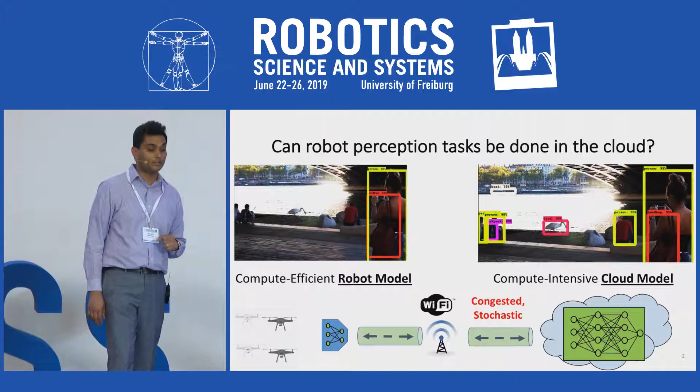If a battery-constrained small drone can't scalably run a cloud model, it can still send or offload rich sensory data, such as video or LiDAR, to the cloud, but this adds delay due to congested stochastic wireless links. Given the limitations of today's real-world networks, but also the accuracy benefits of cloud computing, the core contribution of our work is to design this offloading neural network logic, shown in blue, that decides at every time step whether a robot should use a fast local compute model or needs the accuracy of the cloud.

Despite the accuracy benefits of cloud computing, we seldom talk about the hidden costs of network congestion and cloud communication. As you can see on the left, today's robots are starting to see very rich sensory data, such as 4K video, which can be used to zoom in on very far-off objects to identify them, unlike HD video in this case. But this comes with the principal cost of high bandwidth transmissions over the crowded internet.

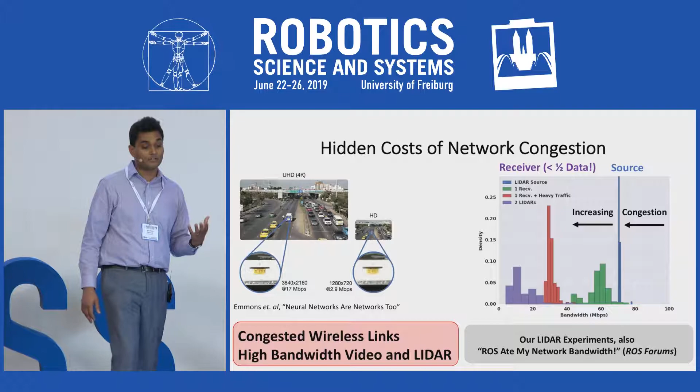As you can see on the right, in our network experiments using ROS, sending LiDAR point clouds over the network adds to congestion, and our current de facto standards are very bad at sending data. So a receiver, shown in purple, often sees less than half the data it was intended to see.

Given the limitations of today's wireless networks, but also the allure of cloud computing, we cast the problem of offloading to the cloud as an MDP. Suppose every robot has a strict budget on how many times it can query the cloud. Then given this budget, but also uncertainty about what the robot will see in the future and how the network will evolve, we have to choose an optimal action of which model is best to use at the current time point.

Since it's very hard to analytically model both how the network evolves and what you'll see in the future, we turn to model-free deep reinforcement learning to learn our offloading decision-making policy. It's control theoretic because a robot needs to carefully manage when it queries the cloud using a strict budget and uncertainty. So the goal of our offloading policy, or RL agent, is to maximize reward.

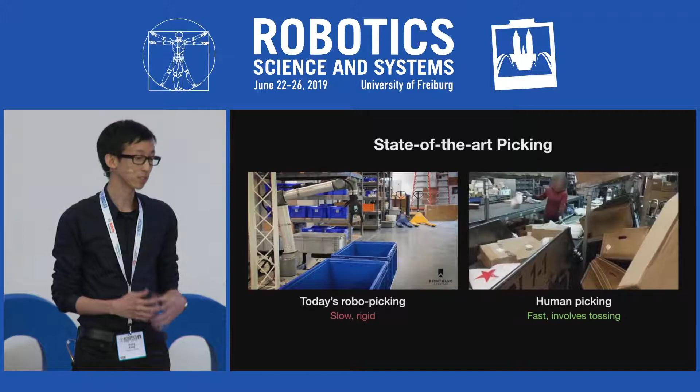Many pick-and-place solutions today are characterized by slow and rigid movements. This is very different from how a human does picking, which is often fast, fluid, and often involves tossing things around. Can our robots do the same?

In this work, we're interested in enabling robots to throw objects to improve both speed and reachability. The task is to grasp arbitrary objects from a cluttered bin and accurately toss them into selected boxes located outside the maximum reach range of the robot. We call our system TossingBot, and while state-of-the-art systems achieve speeds of 200 to 300 mean picks per hour, we achieve more than 500.

Throwing is hard because it depends on many factors. For example, pre-throw conditions, like how you picked it up, can influence an object's projectile trajectory. If you grasp a screwdriver by the handle near the center of mass and throw it, it will land much closer than if you had grasped it from the metal tip, which would swing forward and land much farther. Other factors include varying object dynamics. For example, a ping pong ball will land even closer due to air resistance.

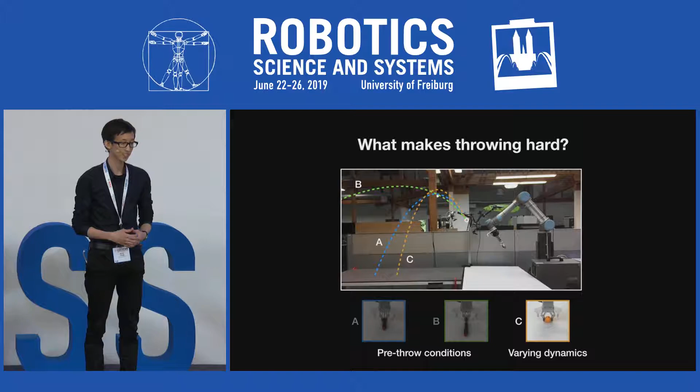To address these challenges, we present two key ideas. The first is that grasping and throwing are two tightly intertwined problems that should be learned jointly. This enables our system to acquire its own pre-throw conditions by learning how to execute stable grasps that lead to predictable throws. The second idea is to leverage both analytical controllers and deep learning to develop a hybrid controller for throwing that handles varying dynamics.

Specifically, we use a physics-based controller to estimate initial throwing velocities. Then we use a deep network to predict the data-driven residual. The initial estimates from the analytical controller generalize well to new target landing locations, while the data-driven residual focuses on learning to compensate for object-centric properties and dynamics. This combined formulation, which we call residual physics, gives us the best of both worlds and is broadly applicable to other tasks, not only throwing.

Here's our system pipeline, which takes as input a top-down RGBD height map of the scene, as well as a target landing location, and outputs dense pixel-wise grasping confidence scores, as well as corresponding throwing velocities to be executed with the motion primitive. The system is modeled with 3 interconnected fully convolutional networks, as well as a physics-based controller, which uses the ballistic equations of projectile motion.

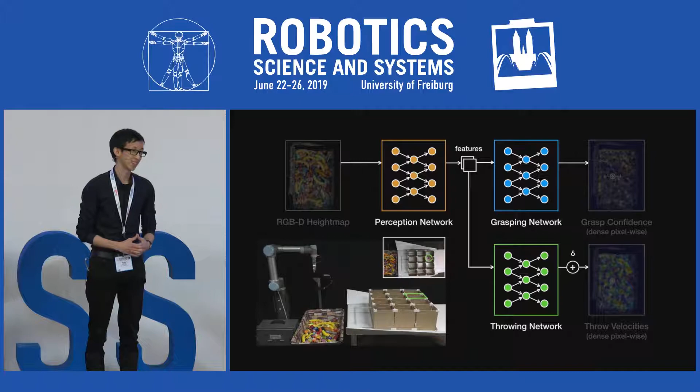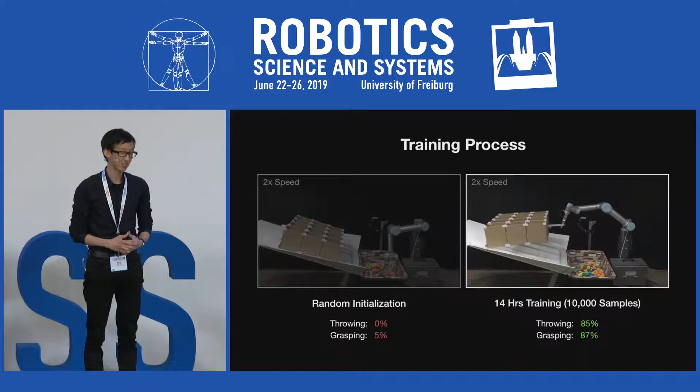Using overhead cameras to track where the object lands, the system improves itself over time through trial and error. During our experiments, the robot takes about 14 hours of real-world training to achieve 85% throwing accuracy, which is better than most of us engineers on the team. The robot also resets its own training so that human intervention is kept at a minimum.

And thanks to residual physics, the system is not only capable of generalizing to novel objects, but is also capable of working for new target landing locations not seen during training.

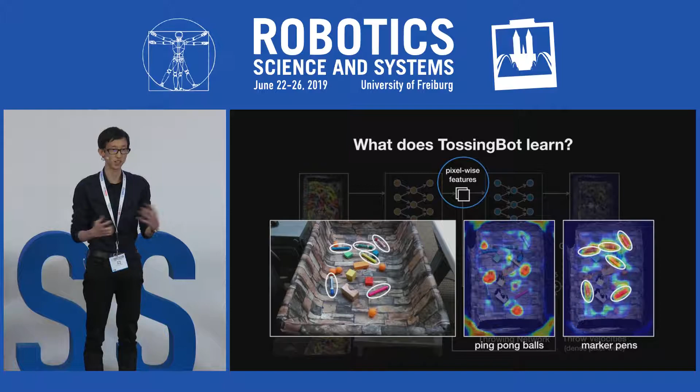So what does TossingBot learn? To explore this question, we extract the mid-level pixel-wise features from the deep network and visualize nearest neighbor clusters in the feature embedding space. Interestingly, this shows that all ping pong balls share similar features, and this is also true for all the marker pens in the scene. These features were learned without any explicit semantic supervision, which suggests that it's possible for robots to discover and learn how to distinguish between different objects on their own, simply through physical interactions.

Happy to talk more about this work offline. Thank you.

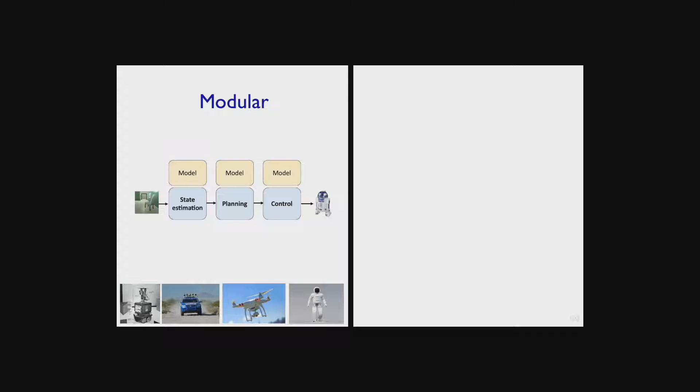The majority of robots today are built on the principle of modularity. The system is composed of models and algorithms, like state estimation, planning, and control. However, modular systems are often brittle because of approximations and modeling errors. In response, the modern end-to-end approach directly optimizes for the task objective using deep neural networks. This produces powerful but highly specialized systems that need large amounts of data to train. We want to reconcile the apparent conflict between the two sides and combine the modularity principle with task-oriented end-to-end learning.

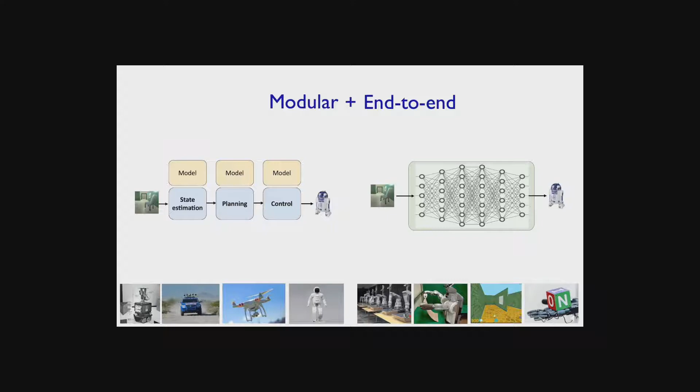We introduced the differentiable algorithm network, DAN. DAN has a modular structure of models and algorithms, but at the same time it is trained end-to-end. The key is to use a differentiable computation graph as a unified representation of both models and algorithms. This computation graph is similar to a neural network, but it also has fixed operations that implement an algorithm, for example a planner. Because it is differentiable, we can backpropagate through the algorithm and train models end-to-end.

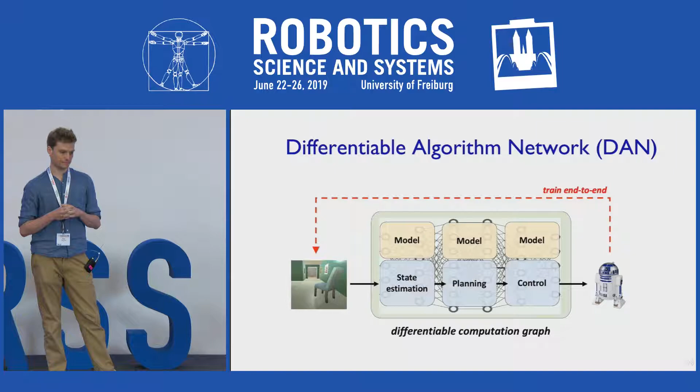Prior work has developed differentiable implementations of many robot algorithms. Here, we put them together and formulate a system design methodology general to many domains. We perform a case study for visual navigation. These are examples of our system navigating in a previously unseen environment, having only a floor map. This is a challenging, partially observable problem.

We need to localize on an abstract 2D map, having only images from a monocular camera showing rich visual features of the 3D environment. Further, we need to navigate to a distant goal while avoiding obstacles not indicated on the map. We tried the standard modular system with perception, state estimation, planning, and control. We also tried an end-to-end neural network with a search over the architecture. They both succeed sometimes, but not always.

Now we take the same modular system, but train it end-to-end using DAN. This system succeeds 99.8% of the trials. So why does that happen?

Compared to a standard neural network, DAN has a particular structure, a task-specific prior, that allows learning from much less data. The modular system learns models independently, and it fails because of modeling errors and algorithmic approximations. DAN increases robustness against approximations by training the models end-to-end, optimizing for the task and for the particular algorithms.

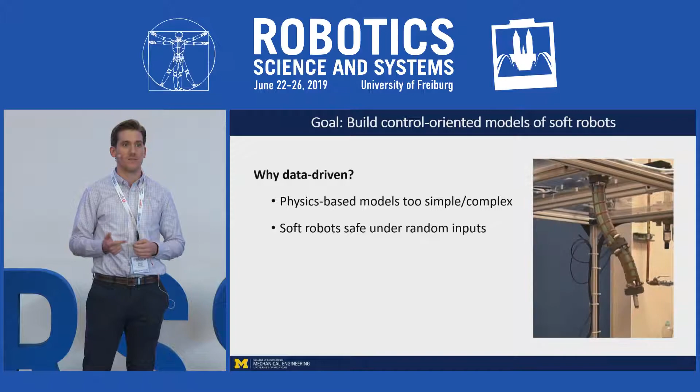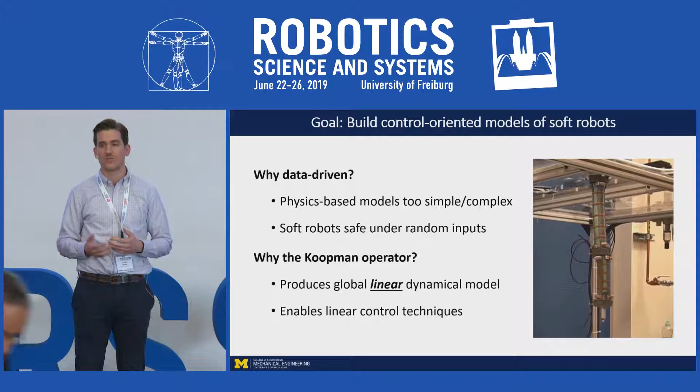The second reason we use data is that soft robots are easy to collect data on, because you can safely give them random control inputs without risk of damage. Now, instead of learning a black box model from data, we thought to use the Koopman operator because it provides an explicit linear model that captures the global dynamic behavior of a nonlinear system. As I'll show, this allows us to use linear control techniques to control a soft robot.

The Koopman operator makes this possible by representing the evolution of the state of a nonlinear dynamical system as a linear operation. So to illustrate how this works, consider some arbitrary nonlinear dynamical system.

Its flow map takes an initial state and flows it forward in time according to the dynamics. Now consider some real-valued function. The Koopman operator is defined as the linear operator that composes functions like this with the flow map of the dynamical system. So if we evaluate the function at the initial state, the Koopman operator flows the value of that function forward in time along the trajectory of the underlying system.

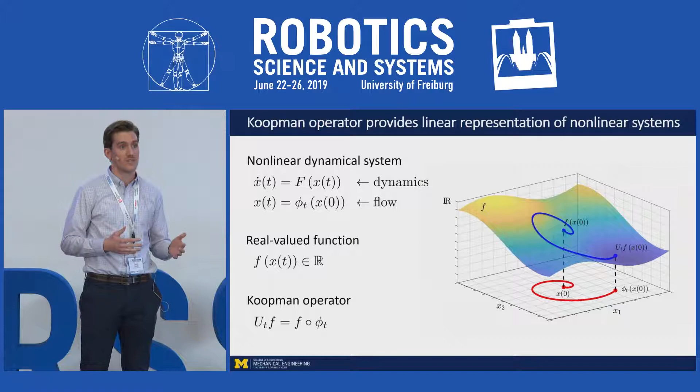Essentially, this lets us linearly compute the future values of functions, from which we can readily infer the value of the state. Now, the caveat here is that the Koopman operator acts on functions, and this makes it infinite dimensional. So in practice, we have to settle for a finite dimensional approximation, which we can learn from data.

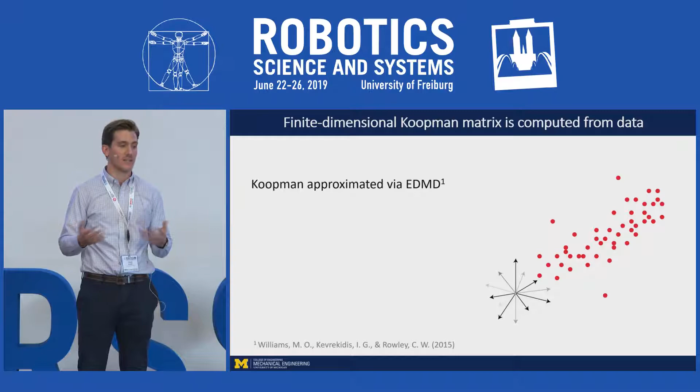The standard method used to compute a matrix approximation of the Koopman operator is called extended dynamic mode decomposition. It involves evaluating a finite set of basis functions on time series data points, and then using linear regression to compute the matrix operator that best describes the evolution of those functions over one time step.

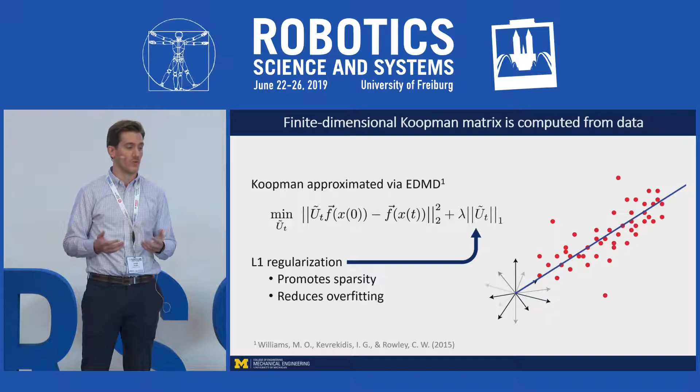In this work, we improve upon this standard method by incorporating an L1 regularization term. This term makes the resulting Koopman matrix less sensitive to outliers in the data. It also promotes sparsity, which is important for real-time control because it improves the computational tractability.

So we use this approach to model and then control the soft robot shown here. It consists of two bending sections actuated by pneumatic artificial muscles, and it projects a laser dot onto a sheet mounted below it. First, we collected data by measuring the location of the laser dot under random control inputs.

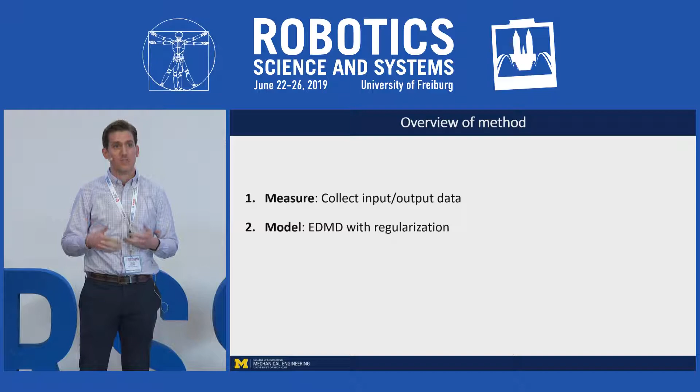Then we used that data to approximate the Koopman operator and verify that it gave accurate predictions over time. And then lastly, we used that Koopman operator approximation to compute online predictions in a closed-loop linear model predictive controller.

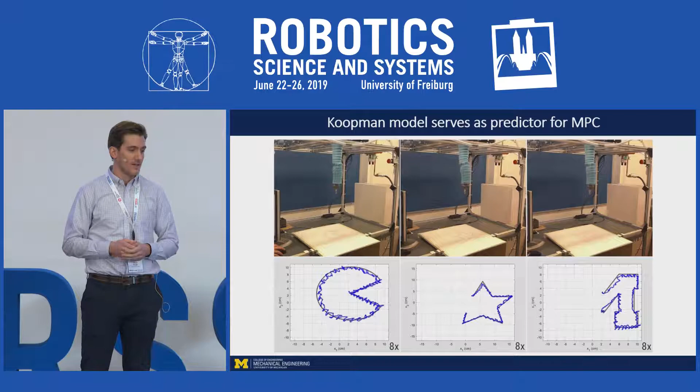Shown here are several trials where, using this Koopman-based model predictive controller, the robot is able to successfully track trajectories in various shapes. And what we found is that our controller proved to be roughly 4 times more accurate and 4 times more precise than a comparison benchmark linear MPC controller. Details of that comparison can be found in the paper.

Hi everyone, I'm Nolan, and I'll be talking about our work, An Online Learning Approach to Model Predictive Control. In this paper, we take an online learning perspective to MPC and propose a general algorithm, DMD-MPC, that recovers state-of-the-art MPC algorithms and lets us systematically generate new MPC algorithms. Finally, we verify this approach on a real-world aggressive driving task.

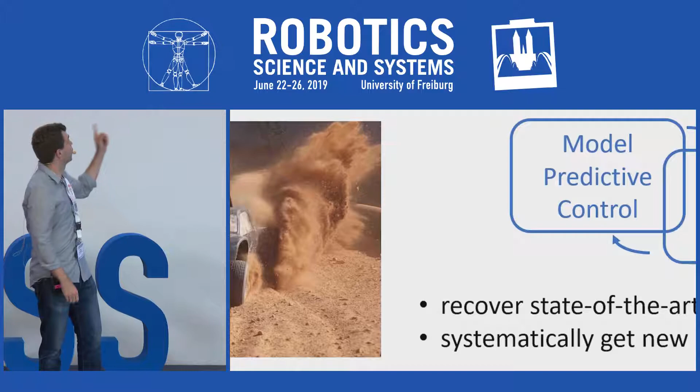First, I'll explain MPC and then its connection to online learning. Let's say we are controlling a robot car around a track. In model predictive control, we maintain an open-loop control sequence, which we then optimize. We then execute the plan on the real system by executing the first control on the system, and then the system will give us back some information for the next step. To bootstrap from the next step, we shift the plan one forward in time, and again repeat the process, optimizing the plan, executing it on the real system, and getting back some update information.

With that setup, we can now make the connection to online learning. In online learning, we have a learner.

Hi, everyone. I'm Nolan, and I'll be talking about our work, an online learning approach to model predictive control. In this paper, we take an online learning perspective to MPC and propose a general algorithm, DMD-MPC, which recovers state-of-the-art MPC algorithms and lets us systematically generate new MPC algorithms. We then verify this approach on a real-world aggressive driving task.

First, I'll explain MPC and then its connection to online learning. Let's say we are controlling this robot car around a track. In model predictive control, we maintain some open-loop control sequence, which we then optimize.

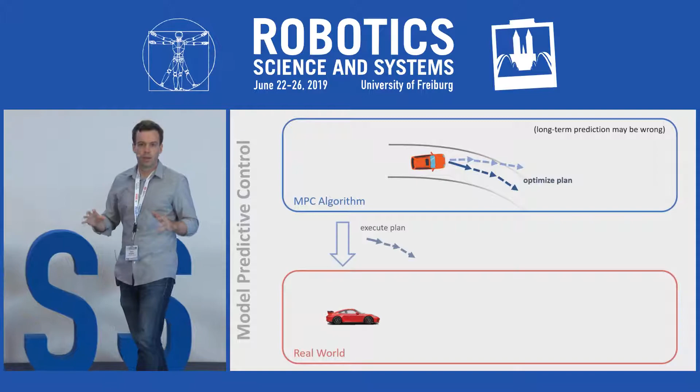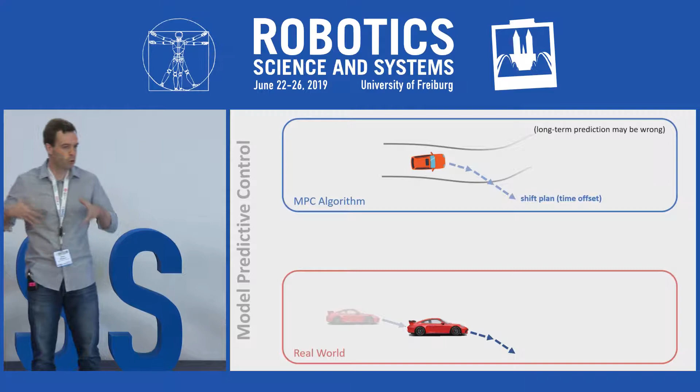We then execute the plan on the real system by executing the first control, and this real system will give us back some information for the next time step. To bootstrap for the next time step, we shift the plan forward one time step. At the next step, we again repeat the process: optimizing the plan, executing it on the real system, and getting back some information.

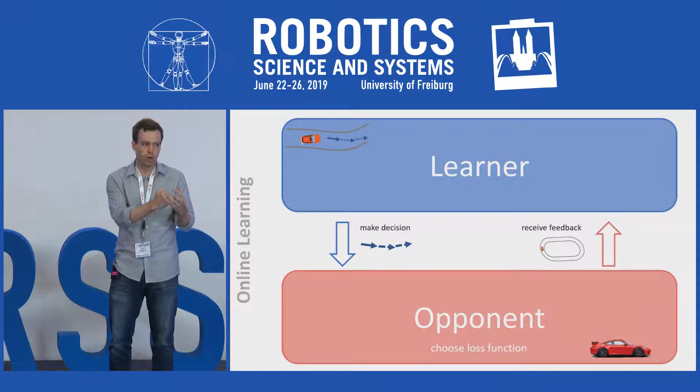With that setup, we can now make the connection to online learning. In online learning, we have a learner and an opponent. The learner makes some decision. In response, the opponent chooses a loss function, which acts as feedback to the learner, who in response updates their decision based on the feedback for the next round.

In DMD-MPC, the learner sends the current control and future plan to the opponent. The opponent's loss function then measures whether that future plan will remain optimal after applying the current control on the real system. The feedback will then be the gradient of the loss function.

The decision update will then work like this. First, we calculate the gradient at the initial plan. Then, we apply a mirror descent step on the plan, which involves minimizing some linearized loss given by the gradient, plus a geometric regularization given by a step size and Bregman divergence.

To prepare for the next round of the problem, we shift forward one time step by executing the current control on the system and sliding the future plan forward one time step. This online learning perspective reveals certain parameters: control distribution, loss, Bregman divergence, and step size, which, as we'll see, provides us a lot of flexibility.

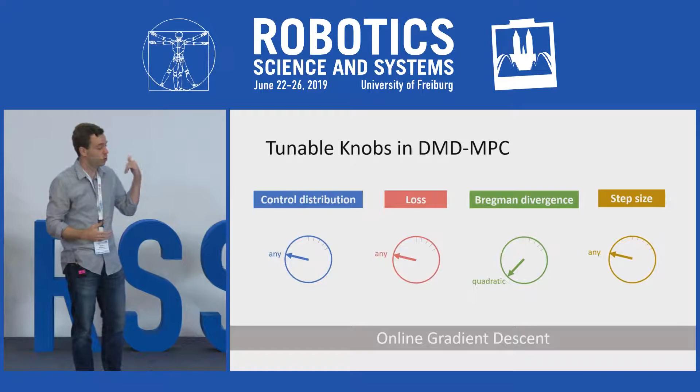For instance, we can generate general purpose algorithms like online gradient descent with a quadratic divergence and any choice for the rest of the parameters. If instead we use a Fisher information matrix, we get natural gradient descent.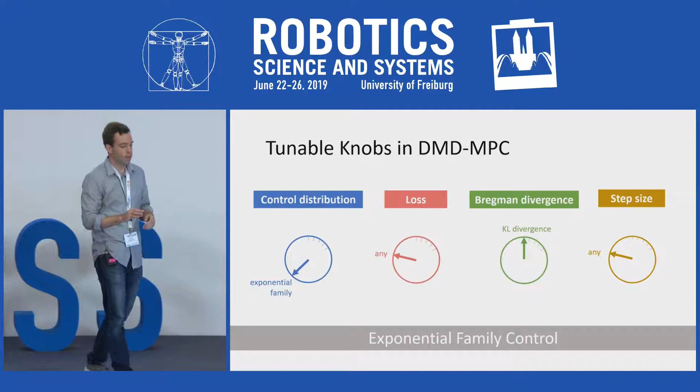If our control distribution instead belongs to the exponential family and we use a KL divergence, we get a general exponential family control algorithm. If instead we have a special form like quadratic loss and divergence, we get the solution to LQR. If we have a categorical distribution and KL divergence, we get a discrete control algorithm.

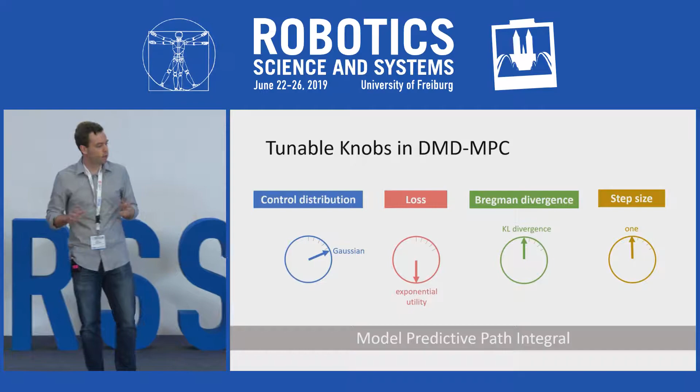With the Gaussian distribution and threshold utility, we recover the cross-entropy method. And finally, with the exponential utility, we recover the model predictive path integral control algorithm. So by simply choosing these parameters, we can systematically generate new MPC algorithms.

Finally, we validate our approach on a real-world aggressive driving task, which involves getting a 1/5 scale rally car to drive as fast as possible on a track. In DMD-MPC, the update gradient is ultimately estimated with random samples, in this case a paltry 64 samples, causing a rather noisy gradient estimate. Such few samples might be expected from a low-power embedded system, for instance.

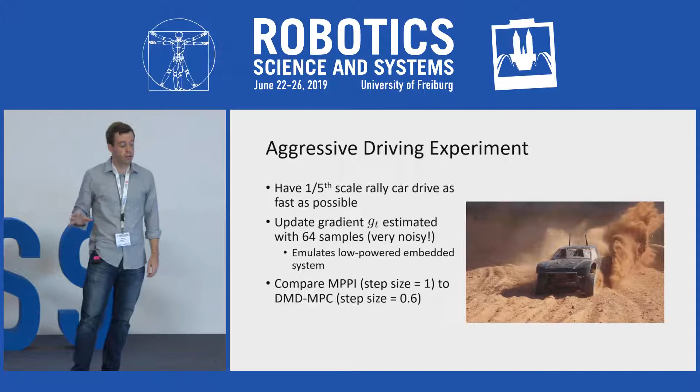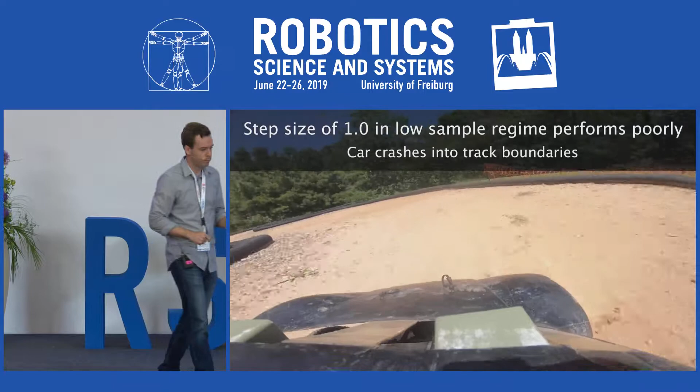In our experiments, we compare MPPI, which has a step size of 1, to the corresponding DMD-MPC rule with a step size of 0.6. With a step size of 1, we get rather unsteady behavior. For instance, the car suddenly turns around over here and goes the wrong way. Here, it drives into this barrier at a moderate speed. And finally, at high speed, it crashes into this barrier.

On the other hand, with a step size of 0.6, we achieve smooth yet aggressive driving with no crashes, and only slightly worse performance than the state-of-the-art version of MPPI that uses 1920 samples and a trajectory tracker.

Thank you all very much, and I'll be happy to answer your questions.

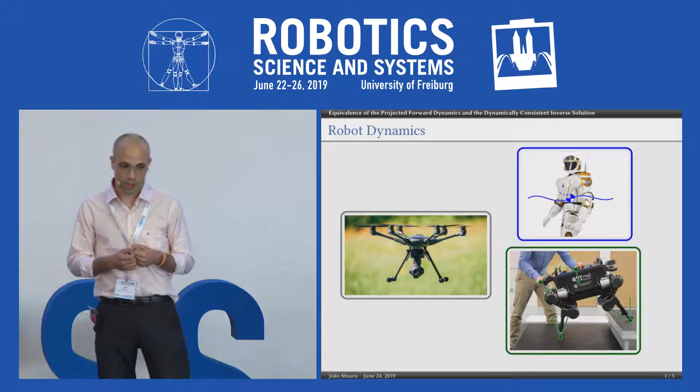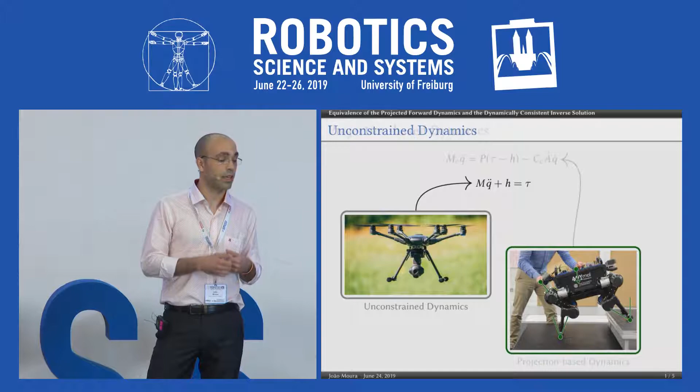So let's start with the contacts. We typically describe the dynamics of an unconstrained robot by its inertia matrix M. One interesting approach, from Aghili, to incorporate contacts in the dynamic model is to define a new constrained inertia matrix MC that captures those constraints. The key idea is to use a kinematic orthogonal projection P to filter the remaining free motion of the robot.

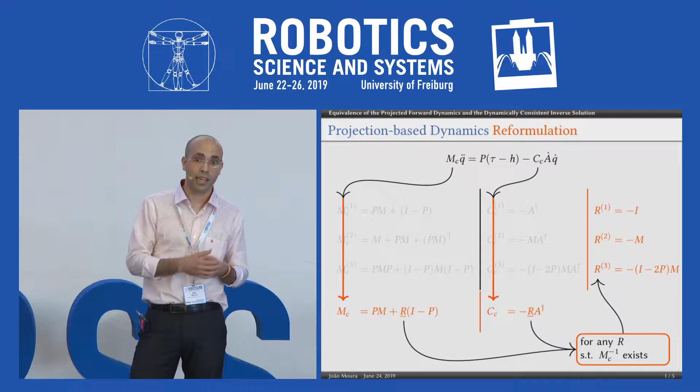There are many works that follow this projection-based dynamics approach when working with real robots having to deal with contacts. However, there are multiple constrained inertia matrices to choose from. So we start by proposing a reformulation that unifies all previous expressions into one, by expressing those two terms as a function of a common free matrix R. Why? First, this unification makes all our future derivations valid for all the previous expressions. Second, if R can be any other matrix, then we can try to find an optimal one.

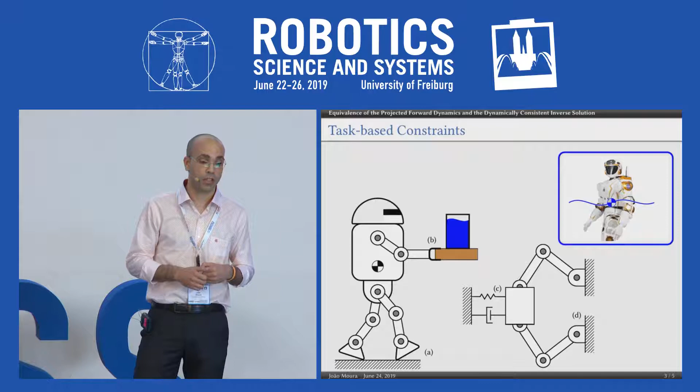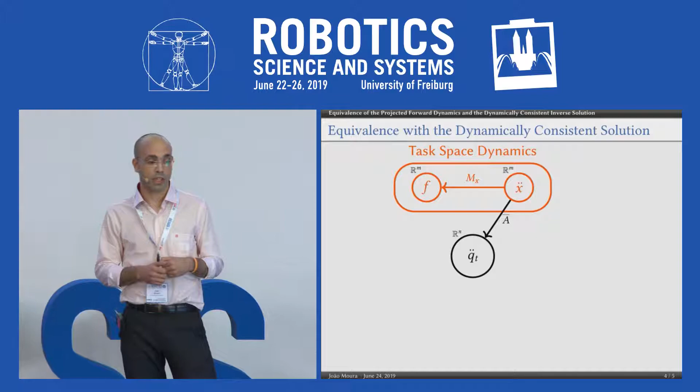So let's now consider motion tasks or behaviors, for example balancing a glass of water while walking, or having a compliant behavior for safe interaction. In that case we can write the equation of motion in the task space by defining a task space inertia matrix MX, and map that to the configuration space using the operational space formulation from Khatib.

In our work, by considering a broader class of task-based constraints, which essentially include both motion tasks and physical constraints, we prove the analytical equivalence of the operational space formulation, typically used for tasks, and the just reformulated projection-based dynamics approach, typically used for constraints.

Why does this matter? The key idea is that this equivalence can help us build a bridge between their associated bodies of research. For example, there are two separate parallel works that propose different operational space controllers with rigid constraints, with different expressions. In the first, De Sapio and Khatib take the operational space formulation and add equality constraints. In the second, Mistry and Righetti start with the projection-based dynamics and add the task space motion.

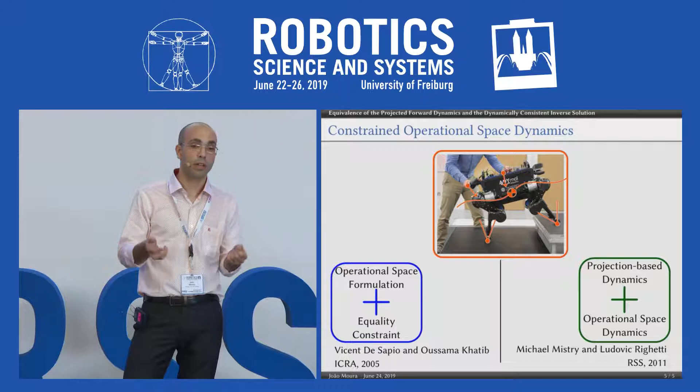By using our finding, we can easily show through simple algebraic manipulations that those two controllers are also equivalent. But bear in mind that these two works are particular instances of two families of research, which include various other controllers, motion planners, and even proofs on stability and robustness. Using our finding, we can now potentially adapt or transfer results from one formulation to another, and ultimately this will improve our understanding of these complex systems.

Thank you so much for your time.

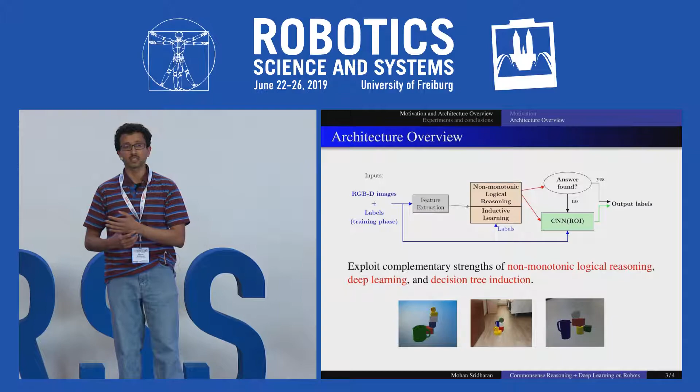Because we said we're going to couple reasoning and learning, anytime you send a sample to the CNN, you're implicitly accepting that your reasoning cannot deal with it. So in addition to just learning with CNN, you also take those same samples and induce additional rules with inductive learning, and it feeds back into your knowledge representation system.

And this gives you at least three key advantages. One, the underlying logical system lets you come up with explanations and answer hypothetical questions—what if something happened, right? The second and third advantages are quantitative in nature.

So if you look at that plot, comparing the red and blue, or the green and black, you see that for any given accuracy, you achieve that with a much smaller number of examples. This is for a simple simulated domain. If you take other robotics domains with more complexity, the difference is more pronounced, but it still scales because of the principles of relevance.

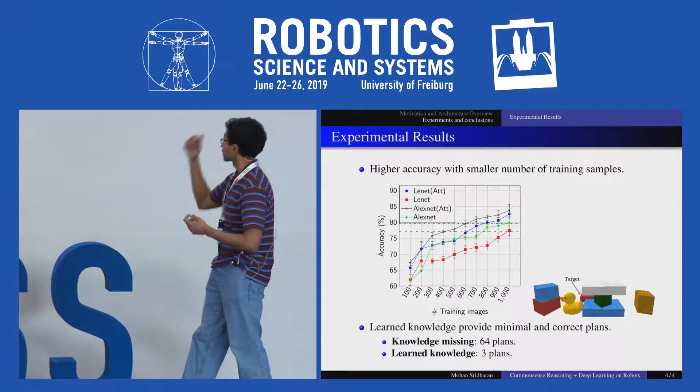The third thing is that because planning and learning are tightly coupled, anytime you learn, you also get better decisions. For that set of toys at the bottom, if you wanted to manipulate the red object and move it to a different location, initially you start with around 60 or 70 odd plans, many of which are incorrect or suboptimal. But if you learn over time, you're able to come up with 3 plans which are minimal and correct. There are additional details in the paper about non-monotonic logic and other aspects, but I'll stop here.

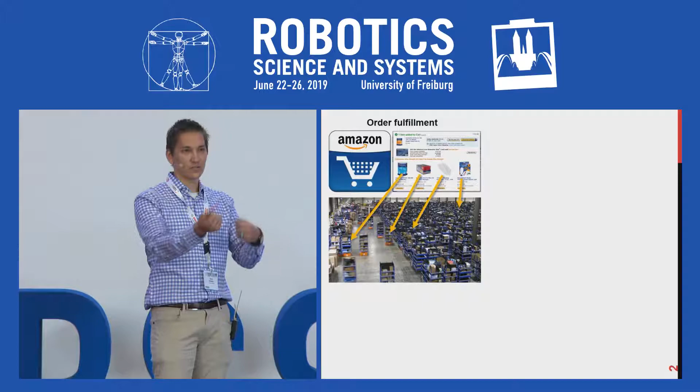In this paper, we're interested in a twist to this problem, which is that we don't know the arrival order of the items that are being given to us. This is common in fulfillment of Amazon orders that go out to a fulfillment center. Robots bring shelves to a packing station, either human or robot, which then needs to put items into a container to be shipped out. So here you don't necessarily control the order in which these robots arrive at your station.

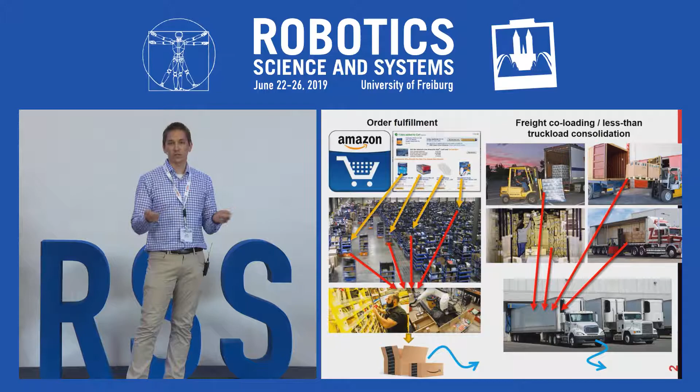This is also common in freight co-loading or less-than-truckload consolidation, where smaller loads come to a distribution center to be loaded into a larger freight truck. You may not be able to control in which order these smaller loads arrive. So this is a middle point between offline packing and online packing, traditional bin packing domains.

In this case, we want to verify that a container can contain the load, but we don't know the order. The first variant we introduce is called NDOP, non-deterministically ordered packing, where the sequence the objects arrive gets revealed to you after you've verified the container is feasible for all possible orders. In the second case, we have quasi-online packing, where you have to pick a location for the item when it's revealed to you, but you don't know in which order the subsequent items will be given to you.

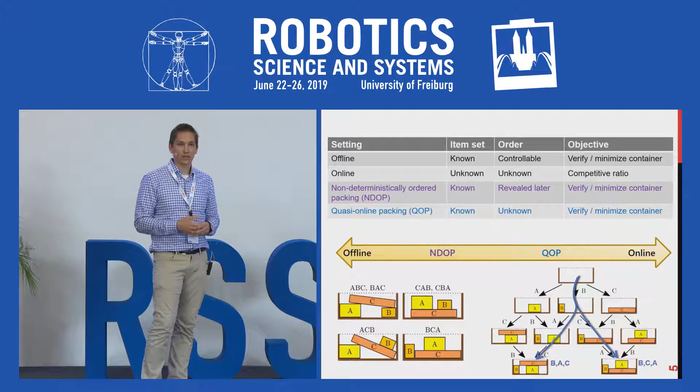What we do in this work is build off our previous work in 2019 ICRA, where we assume there's an offline planner available to us, which we call the Oracle. This Oracle uses stability constraints as well as loadability constraints to verify that a robot can load these items into a given container. We assume the Oracle's job is to handle all of these continuous constraints.

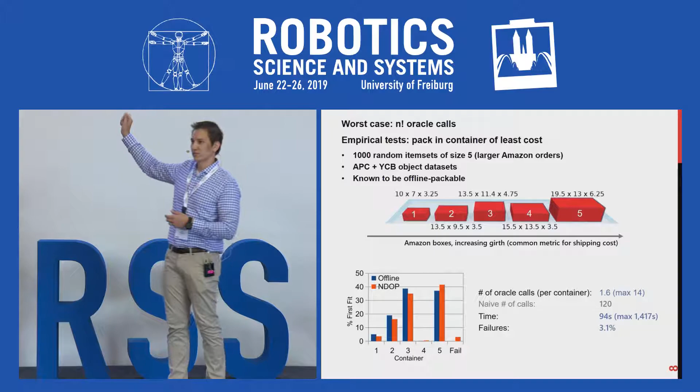What's interesting is that the solver inherits the completeness of the oracle—if the oracle is complete, the planner is too. Empirically, even though in the worst case this is still an n-factorial algorithm, the number of plans we have to solve in practice is very low. For the APC or YCB datasets, we sampled 1,000 random object sets. With 5 items, we have to solve on average 1.6 plans per container, much less than 120.

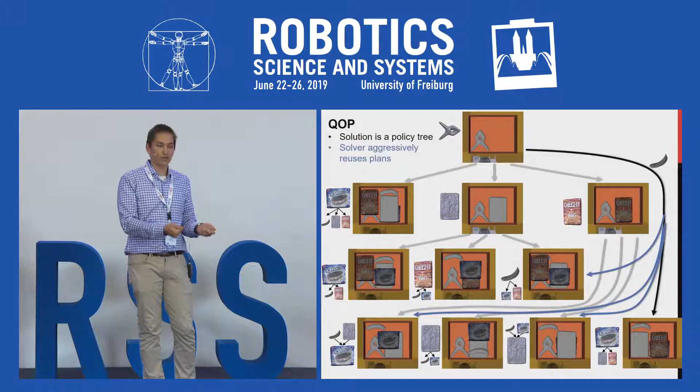For the quasi-online packing solution, the solution is interestingly a policy tree. For every item revealed to you, you have to place it in a given location. We still enumerate all the different leaves of this policy tree, which is a factorial number of leaves. But our algorithm very aggressively chooses to reuse plans generated before. For example, when this banana gets revealed, 3 of the possible future sequences can reuse plans generated in the previous enumeration of this tree.

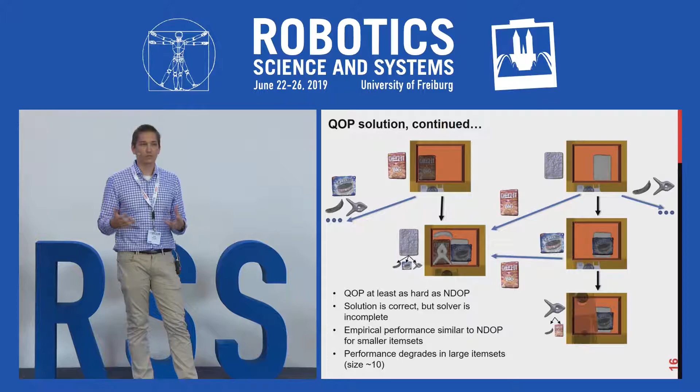If the banana is revealed after the pliers, that's what you do, but if the banana is revealed first, this is what you do, and so on. So it's actually quite a large tree. But we proved in this paper that the QOP problem is at least as hard as the NDOP problem. The solution is always correct, although the algorithm is incomplete, even though the oracle may be complete. There's a lot of interesting empirical performance—it's quite tractable with small numbers of items, but tends to break down for larger numbers of items. There's also a lot of interesting theoretical results.

I messed up with this poster, unless you can time travel, so I'll talk to you about this later. Thanks.

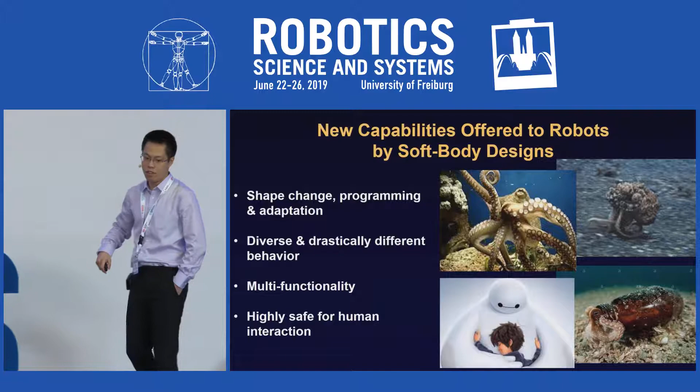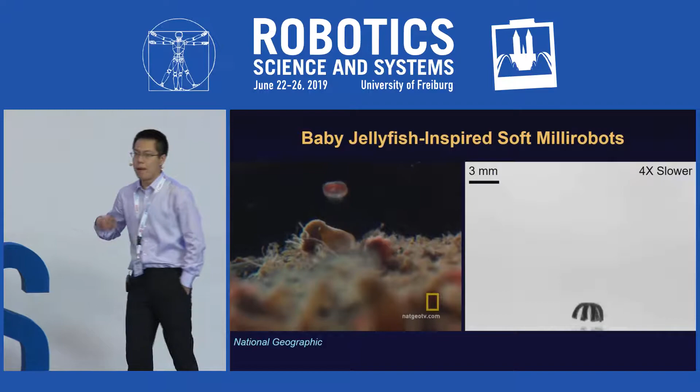A soft-bodied baby jellyfish is one of the most widely spread creatures in the ocean. It adopts a paddling motion to propel at millimeter scale. Inspired by this efficient swimming propulsion strategy, we developed a magnetic soft Milliswimmer that has the same size and can achieve the same motion as a real animal.

The real moon jellyfish has 8 arms, called lappets. We keep this design in our robot. Our robot is composed of 2 parts: the 8 magnetic lappets that can bend under an external magnetic field, and the passive non-magnetic polymer. The overall size of the robot is only 5 millimeters in diameter.

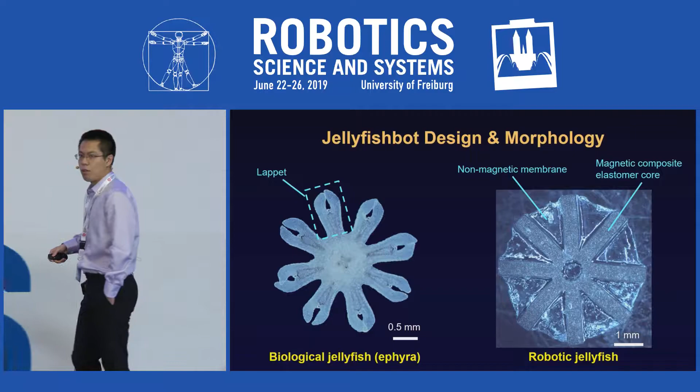To fabricate such a tiny robot, we first form a thin layer of magnetic soft material on a flat plate. Next, we use a UV laser to cut the lappets out from the plate. Then we use a pipette to drop a water droplet at the center of the magnetic lappets, and due to surface tension, the robot will be wrapped up into this shape.

We freeze the water droplet to keep the shape of the robot, and apply a uniform magnetic field to magnetize the material. This creates a magnetization profile that is critical to achieve the deformation under the external magnetic field. In the last step, we fill the gaps between the robot with non-magnetic polymers.

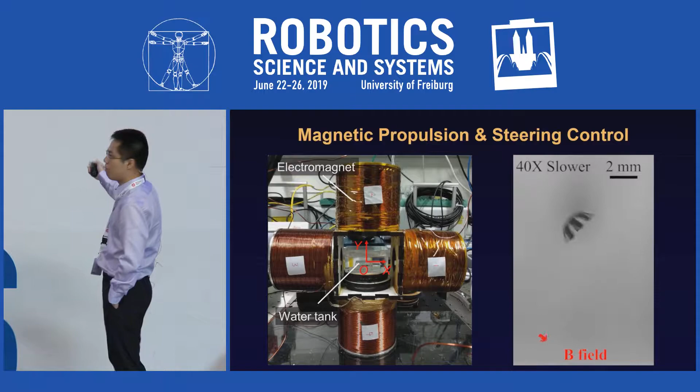The robot swims in a coil system that can provide an arbitrary direction of magnetic field. By applying an oscillating magnetic field along the body's central axis, the robot can realize propulsion. By rotating the direction of the magnetic field, the robot can be steered. The robot swims so fast that we slow down the video.

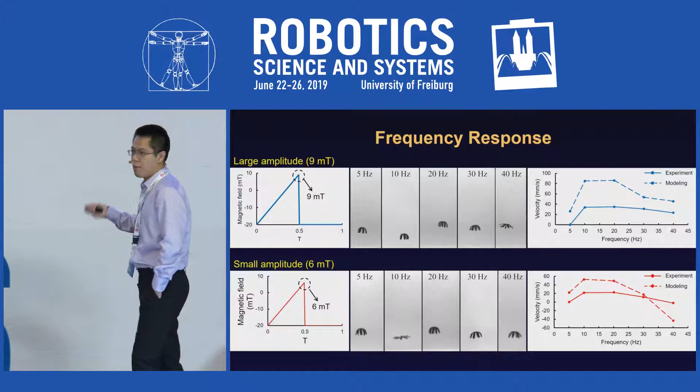We apply two kinds of control signals to evaluate the propulsion performance of the robot with different amplitudes. Both the modeling and the experiments demonstrate that the robot can achieve the highest swimming speed with a larger beating amplitude, and the optimal frequency is between 10 to 20 hertz.

We also demonstrate multiple functions towards medical applications on our robotic platform. In the left video, I will show you the robot can trap cargo during its propulsion using the fluid flow generated around its body. This function will be useful to transport drugs in complex environments.

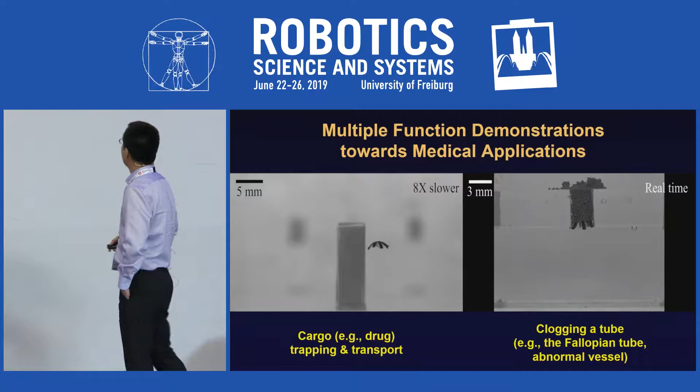In the right video, we show that due to the softness of the body, the robot can clog a tube. This function will be useful to clog a fallopian tube in the future for birth control. Another example: we can use a catheter to send the robot into the bladder, let it swim upwards, and finally attach to the cancerous tissue to release drugs for a long time.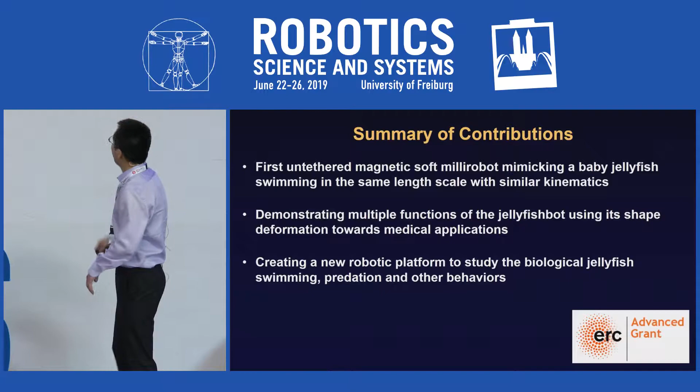In this study, we propose the first untethered magnetic soft milliswimmer that can mimic the swimming of a moon jellyfish at the same length scale. We demonstrate multi-functions towards medical application using the shape deformation. The robot itself is a very good platform to help us understand biologically relevant questions. Thanks for your attention.

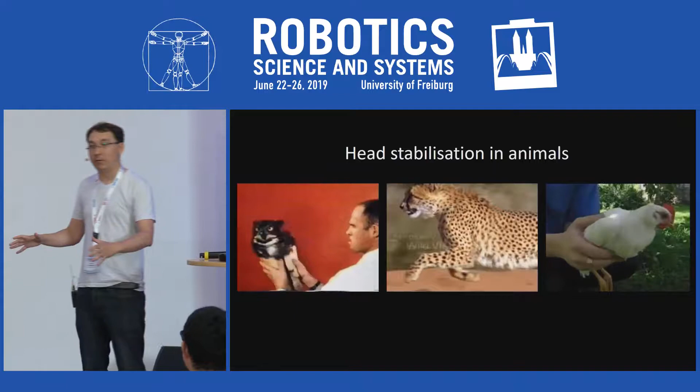Should robots do the same? Why is it important? Traditionally, robotic systems rely on ground information for stable locomotion, and more recent robotic systems start having their head stabilized. But why do we need to do this? Is it important?

Humans also stabilize their head, and for humans this is important for motion planning and stability. The goal of this study is to investigate the importance of head stabilization for verticality estimation.

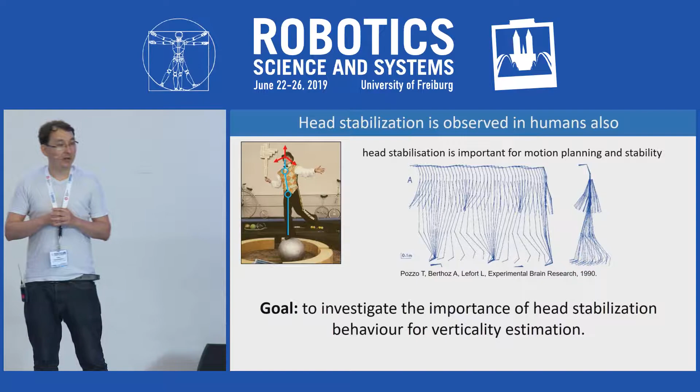Knowledge of gravitational vertical is important for stable locomotion, and otoliths located in our vestibular organ are responsible for this. In our work, we propose a model to demonstrate the importance of head stabilization behavior for verticality estimation. The model is composed of a head, trunk, head stabilization controller, and a spherical pendulum to mimic the behavior of an otolith organ.

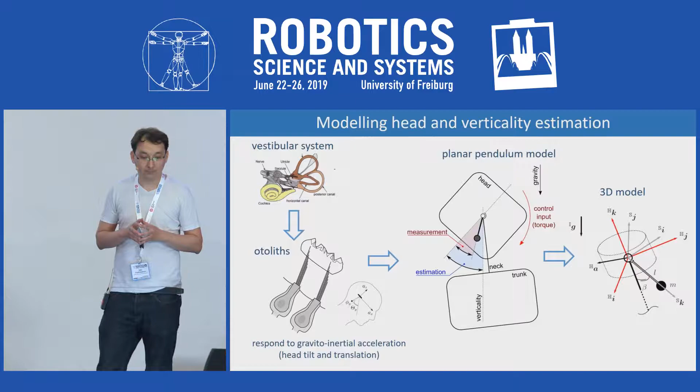Our vestibular sense can be tricked when our head is tilted and accelerated at the same time. This is called gravito-inertial ambiguity. But if the head is stabilized, we can assume that the pendulum or otolith can act as an accelerometer, and then a simpler linearized model can be used.

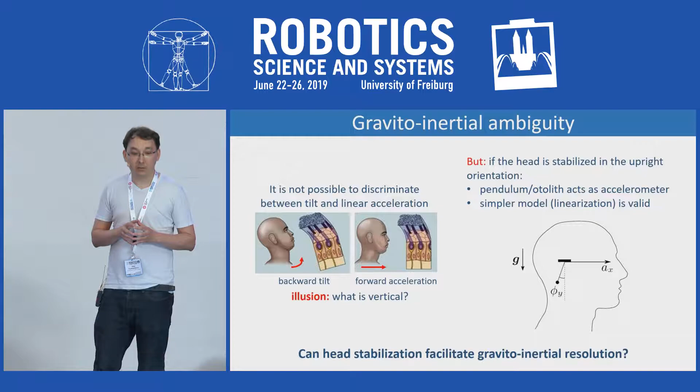We developed a model composed of head and pendulum coupled dynamics equations of motion and a head stabilization controller. Our system can move freely in 3D space, and the model is nonlinear, but it can be linearized if we consider a stabilized head.

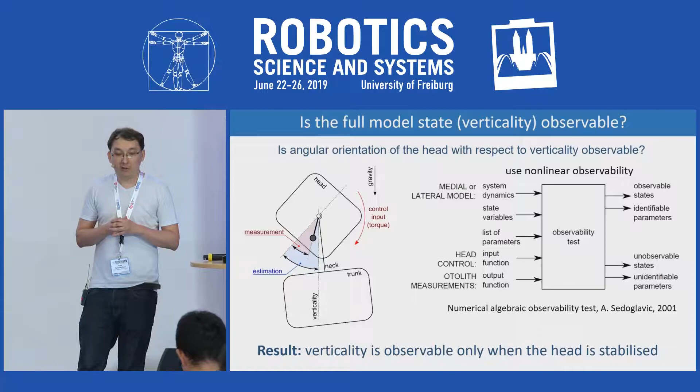We wanted to know if angular orientation of the head with respect to the vertical is observable based only on the pendulum measurements. To do that, we ran a numerical algebraic observability test, and we found out that verticality is observable only when the head is stabilized. To further develop our verticality estimator, we consider the following model assumptions.

To investigate the performance of our estimator, we ran a simulation study for two cases: Case 1, when the head was not upright, and Case 2, when the head was upright and stabilized. Simulation demonstrated that verticality estimation error was significantly reduced when the head was stabilized in upright orientation.

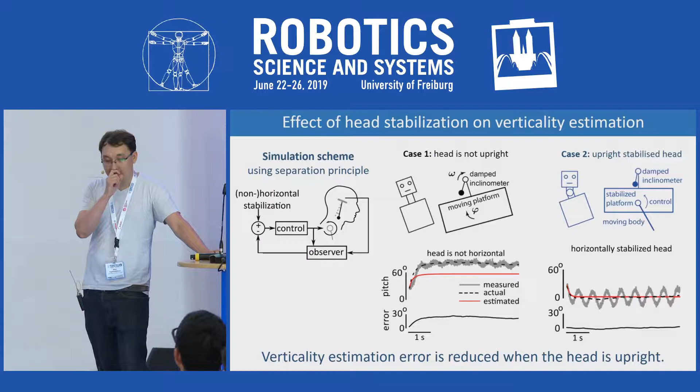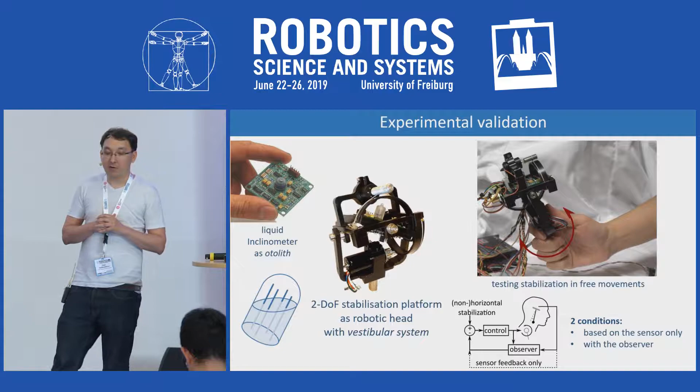Finally, we developed a robotic prototype to model our system. The model was based on a liquid-based inclinometer, and we ran an experimental study to investigate the performance of our head stabilization controller in two conditions: based on the sensory input only, and based on our observer, which is shown on the right video here.

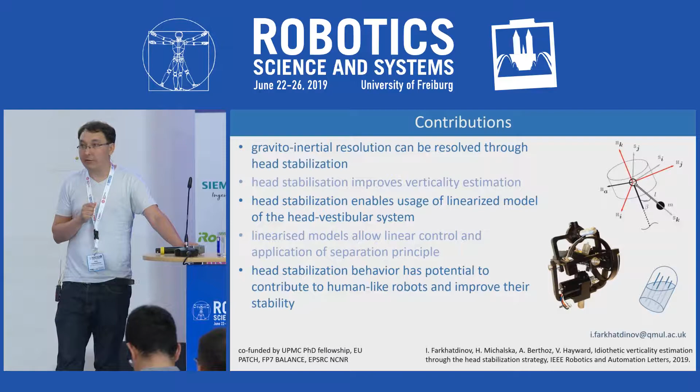In this study, we demonstrated the importance of head stabilization behavior for verticality estimation. The results of this study are applicable to a wide range of robotic systems with a moving frame of reference. Thank you.